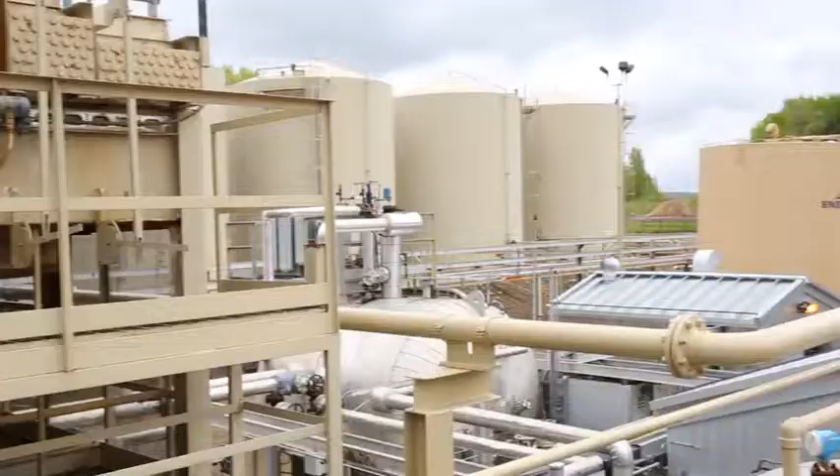Enerchem is a premier producer of hydrocarbon fracking fluids, drilling base oils, and workover solvents. The existing system that was in place at Enerchem had a lot of flaws. It was reporting using a different vendor's package. It was exporting to a very primitive database, and all the reports were made up in Excel. It wasn't very manageable, it wasn't accessible.

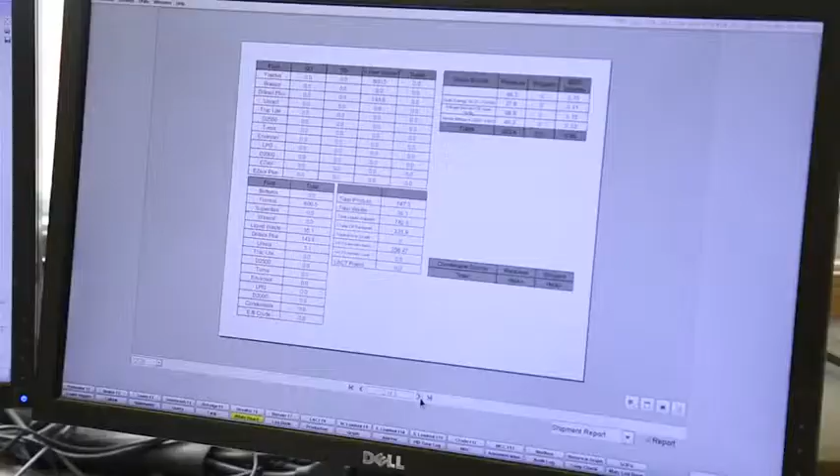So we introduced Ignition at that point in time. We did all the reports from there. Everyone was happy. We decided to get rid of the existing control platform, which was also very limited and also had accessibility issues. And we introduced Ignition. They're able to graph everything when they need to. We're able to add all auxiliary systems, such as the logbook, such as auditing, that the other systems just did not have.

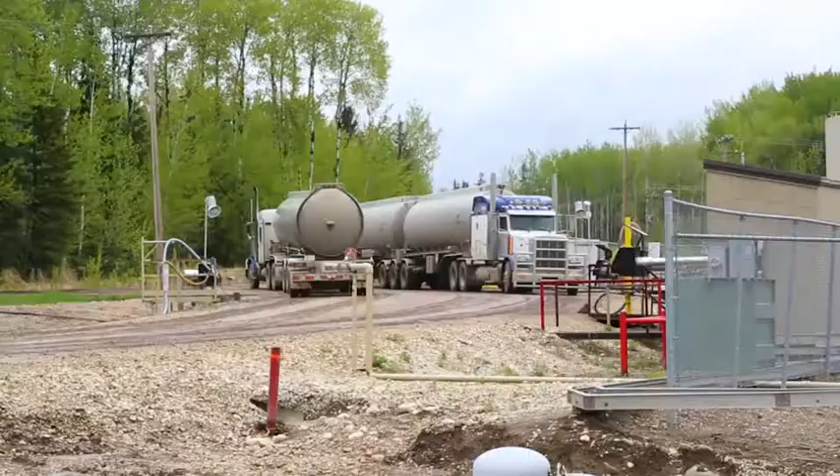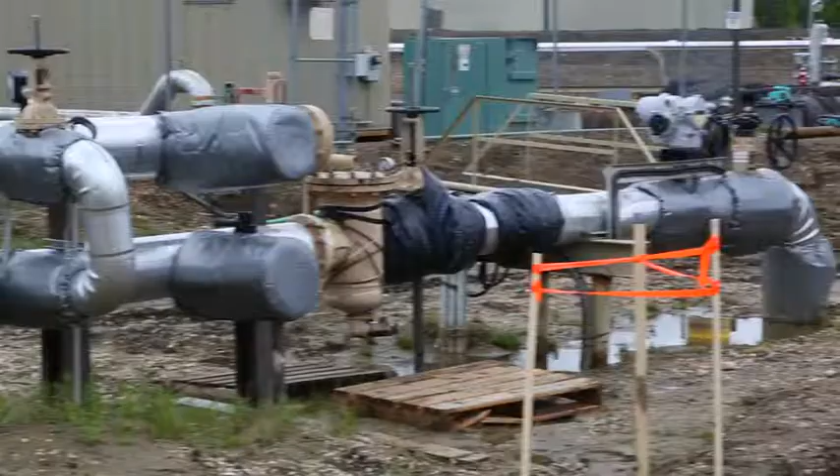This is where we heat the crude oils up. So the raw crude oil material comes in from the tanks. We go through a series of preheats and then into the big crude furnace. Then the crude oil is superheated and ends up in the fractionation tower. Through a series of preheats and cooling systems behind the fractionation towers is where we do a lot of the trimming of the product.

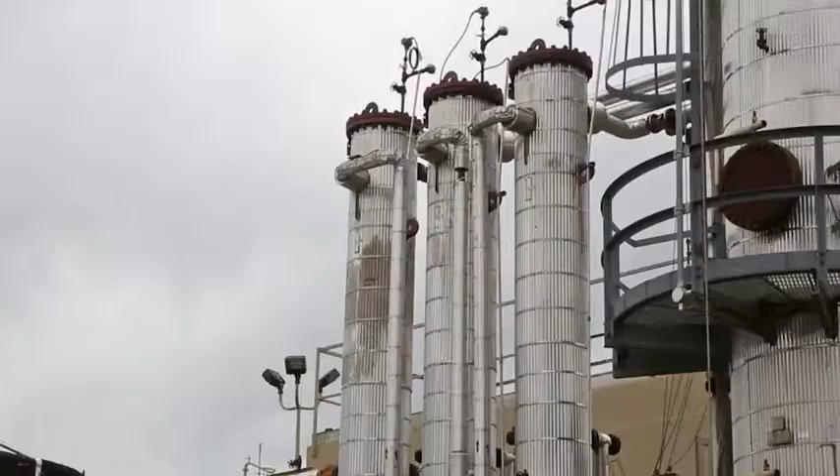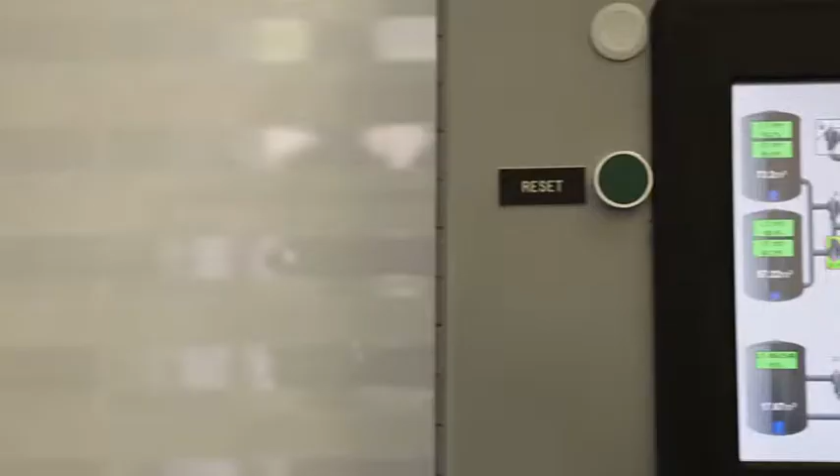So the three main products, your base oil, your frac fluid, and your workover solvents, go through the three side strippers, and in there we polish this off. Now this is all done and maintained by very tight controls provided by the Ignition control system on the HMI itself. So we've got a little over 30,000 tags feeding back to the HMI, and it allows us to have very precise controls to maximize the yield that we're gaining out of the crude oil process.

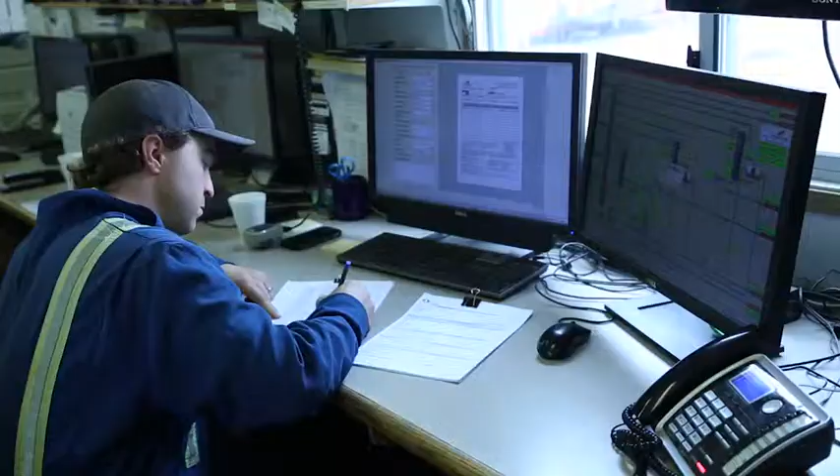Enerchem has a few different control networks, including Ethernet IP and Modbus. Ignition provides a flexible solution for communicating with these different end devices based on OPC UA. Ignition is also acting as an OPC UA client to other PLCs that have an embedded OPC UA server. All of Enerchem's facilities are interconnected to each other through OPC UA, sharing live plant information between them.

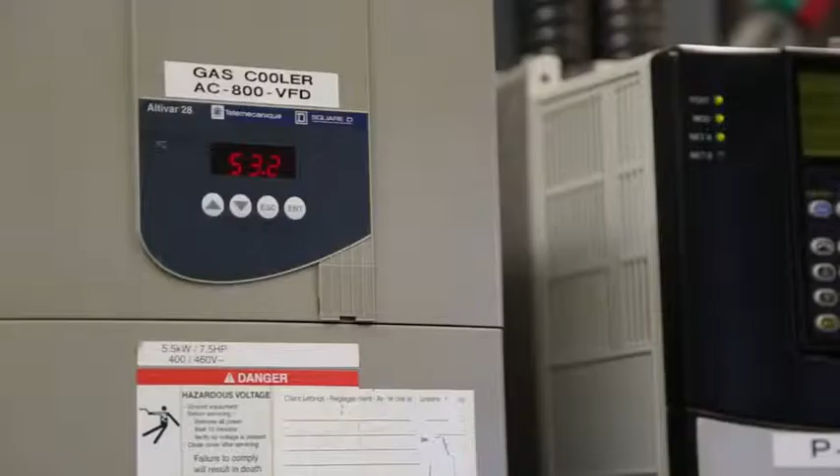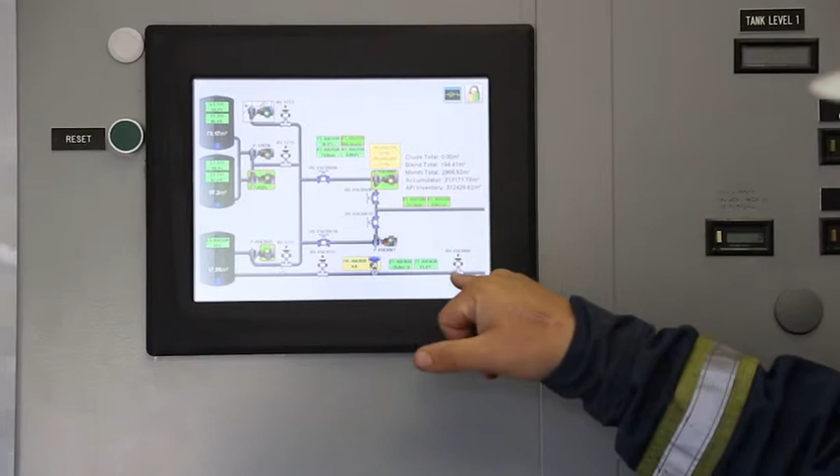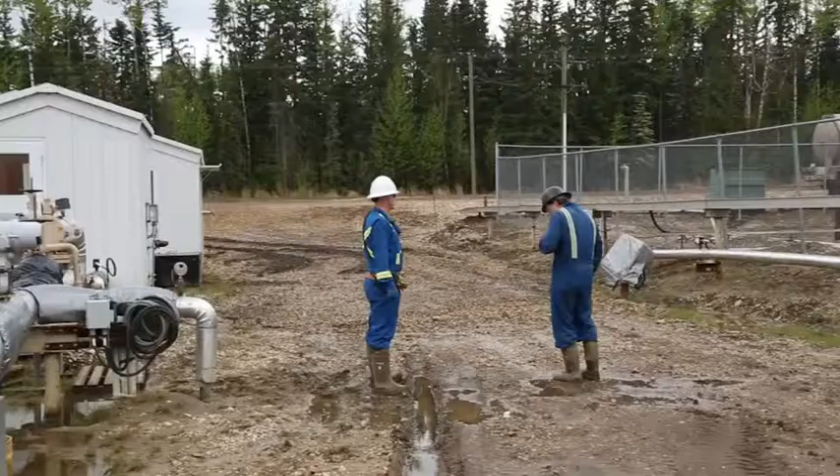We're over at the LAC unit, which is the sales system for the mini refinery here. As you can see, we've got our blend tanks, we control the pumps and outputs, and we've got metering systems, all on the remote panel set up out here. This system allows the 10 to 15 different processes that we have operating in the plant to all be controlled by one operator, whereas with previous HMIs we had to have 2 or 3 operators on the panels in order to be able to control it.

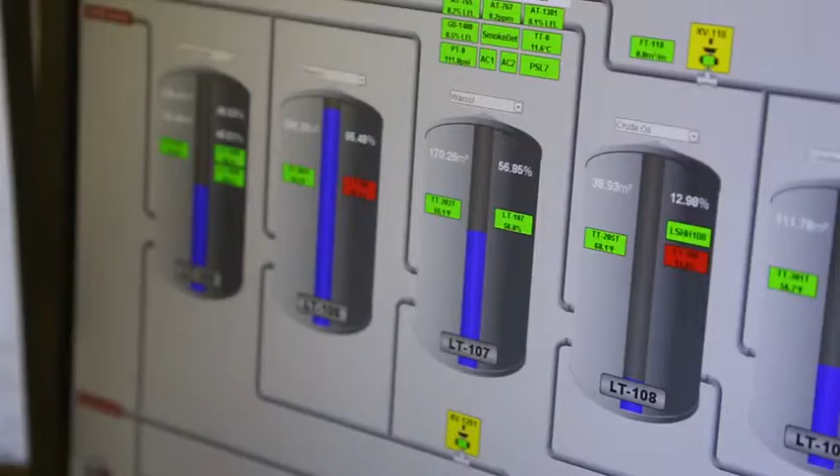Switching everything over to the Ignition software has given us a number of advantages from a business standpoint as well as an operational standpoint. It allows real-time inventory remote access from a number of different divisions within the company. We're able to put in restricted access and read-only access rights for different users, as well as the trending capabilities, and the overall efficiency of the yield that we make out of the product compared to the crude we consume is much better. So it's a more economical and profitable system for us.